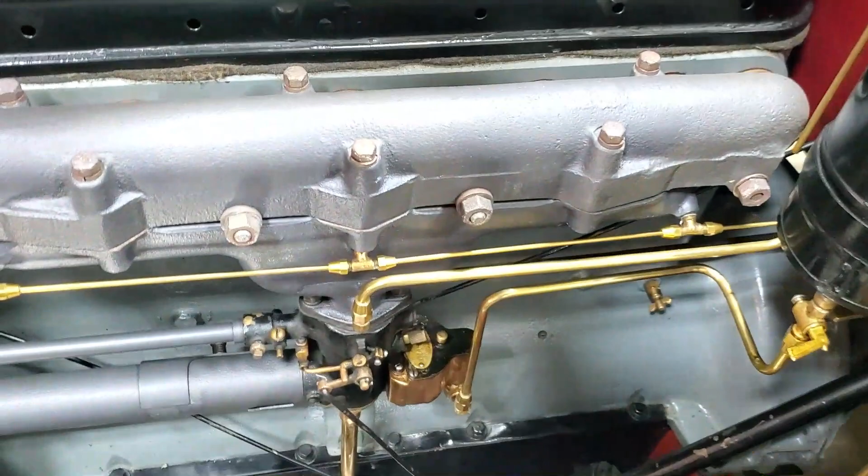This car looks mighty fine. Outside the hood and inside the hood, I call this the trophy wife of engines - beautiful on the outside, riddled with problems on the inside.

When I bought this car, the engine had been rebuilt, I think, in the 50s. They did the best they could with what they had. After that, this car had no antifreeze put in it - it had regular water, and during the winter they'd drain the water. What happened is through many years of that, the block had rusted through from the coolant jacket into the crankcase. I'll post a picture of that in the video.

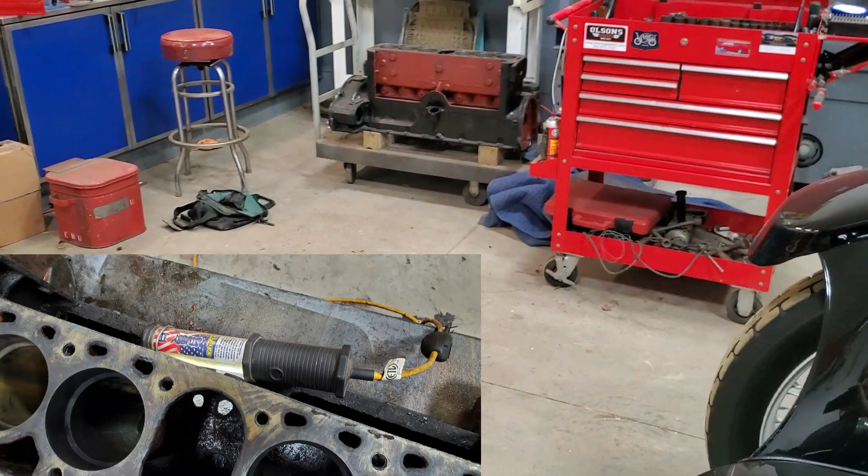Lucky enough, when I bought this car, a spare engine had shown up. It was not in the shape that it is right now - it was a rusted pile of metal with mice living in the coolant jackets. I cleaned it up, sent it to a machine shop. I'm not going to mention the machine shop's name. I think they got in a little over their head with this engine, and I'm going to explain why.

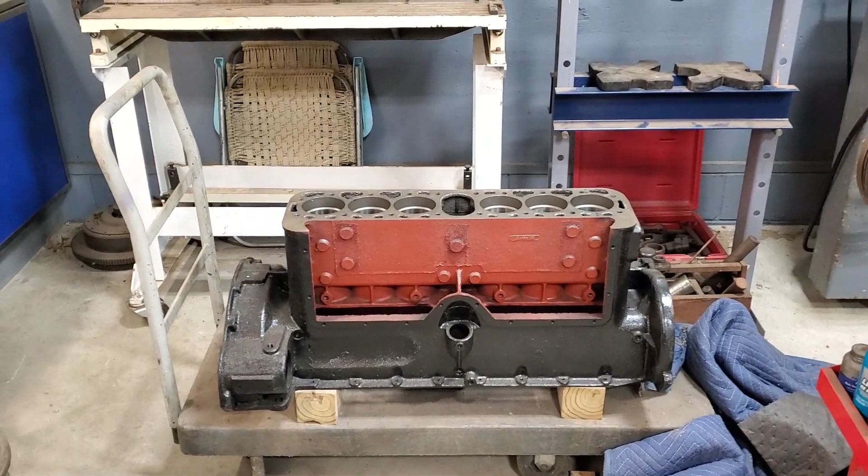I got this engine back a year and a half ago. I should have rebuilt it then, but I was pretty discouraged with what I found. I have over 30 years experience building engines, and I just don't take anybody's word for anything. So I got out the micrometer and the bore gauges and went to town.

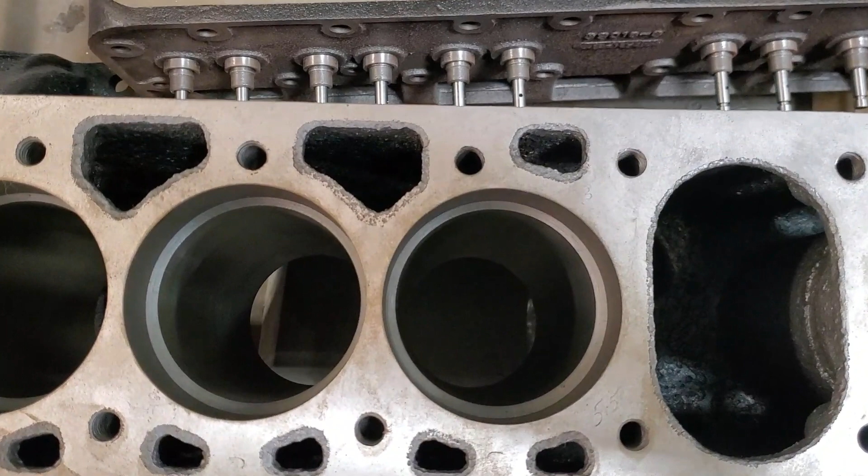The first thing I noticed by looking at the engine is if you look straight down the bore here, when they bored it, they didn't do it centered with the old crank line. You can see there's 5.5 millimeters here, and there's 3 millimeters here.

Now, at the time I sent them the block, I asked them to sleeve it. They told me, after they had the block for almost a year, that they couldn't sleeve it for various reasons. I should have gone and got the block - I didn't. They bored it over, off center. Every single bore. I only have 3 millimeter wall thickness on this side into the coolant jacket, and it's on the thrust side.

I'm keeping my fingers crossed with this because this is not a high horsepower, high torque engine - we might be all right. If you can see down in there, there's a casting web from the outside of the block to the bore, and that's where the thrust is going to be on the piston. So that might help.

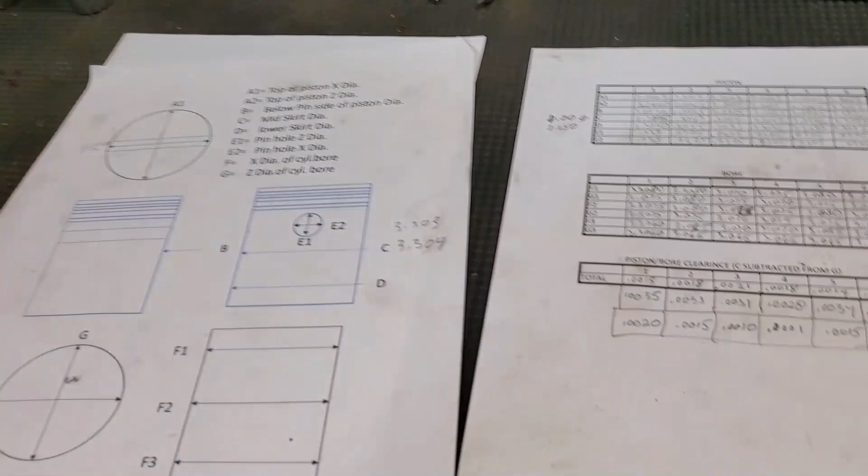The other thing I'm not happy with is when I measured out the bore piston clearance on the thrust side, they only gave me 1.5 thou. On the pin side, 3.5 thou. It should have been 3.5 thou all the way around.

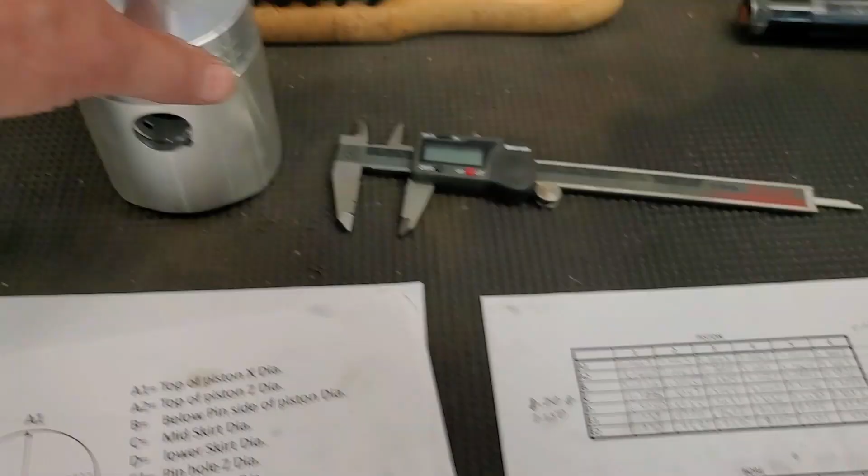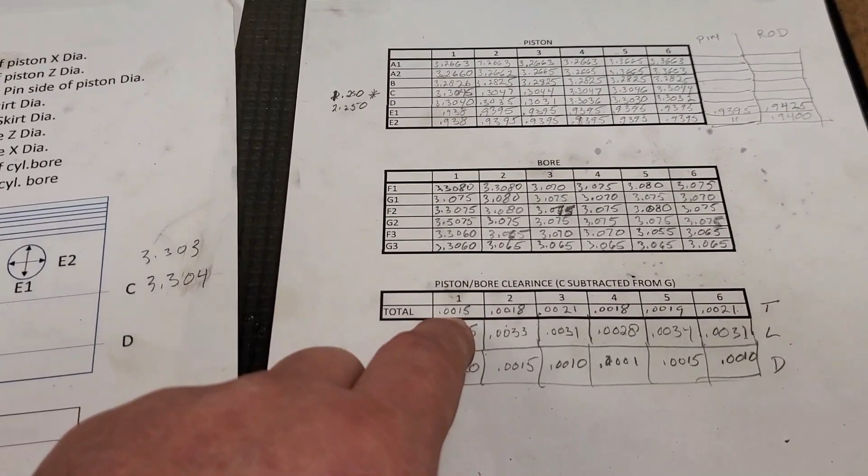This bore is not round. We've got aluminum pistons going in this - they heat up quicker than the block would, and that will tear up a block bore pretty quick. I need at least 3.5 thou, I don't want much more out of that. So I was pretty discouraged with that.

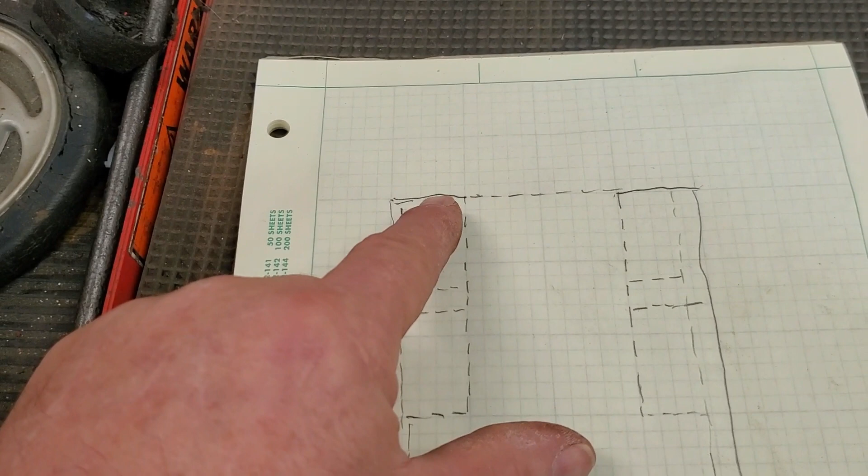This is looking at the block front-wise through. Those are those casting webs that I was talking about. I think what they did is when they bored this block oversized, they were taking too big of a cut, and as the cutter started to come down, the bore actually deflected - it did one of these deals here. It also did the same thing between bores.

These are not Siamese bores - there's coolant jacket between the bores. So it deformed the bore when they were taking their cut. That's the only thing I can think happened here.

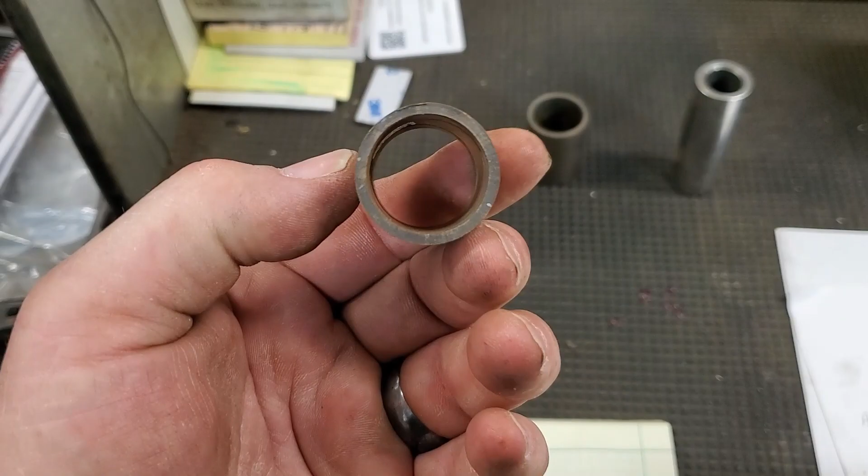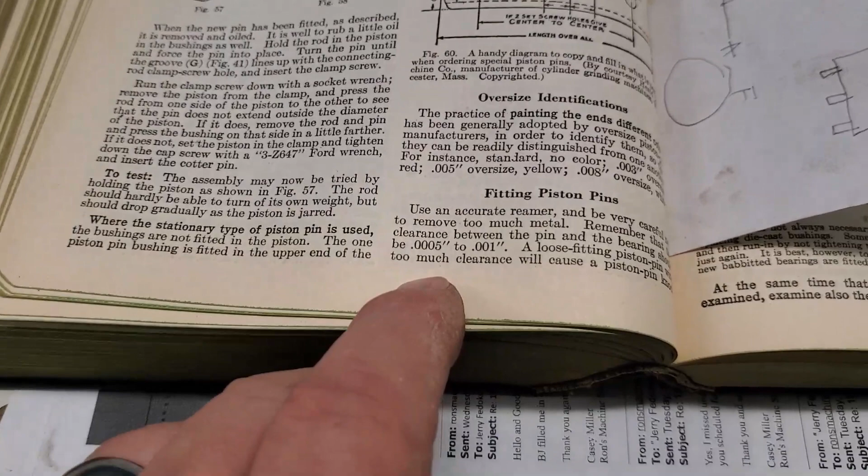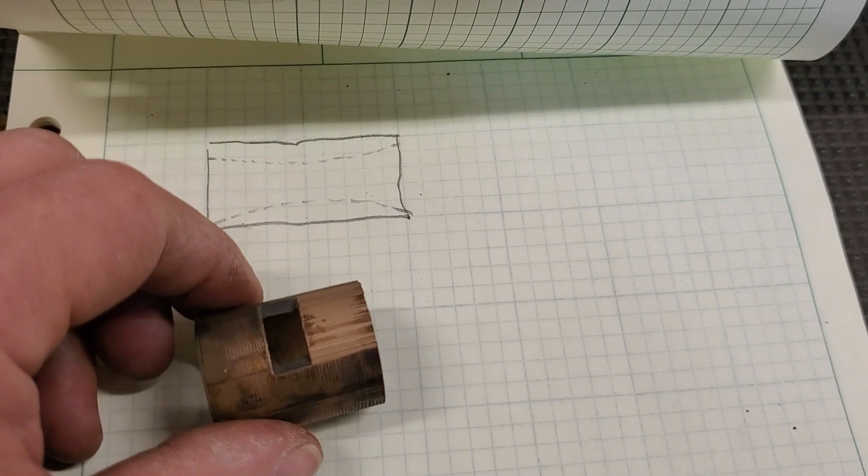Another thing they did - this is the stock piston pin bushing. Now I've got my Dykes manual out here, this book is from 1922 I think. I should only have a half a thou to a thou pin bushing clearance. What they did, I don't know why, is they machined or polished the bushing, and on the inside it's tapered. I've got 4 thou clearance on either side. So the piston is going to be doing this, and that's not working for me.

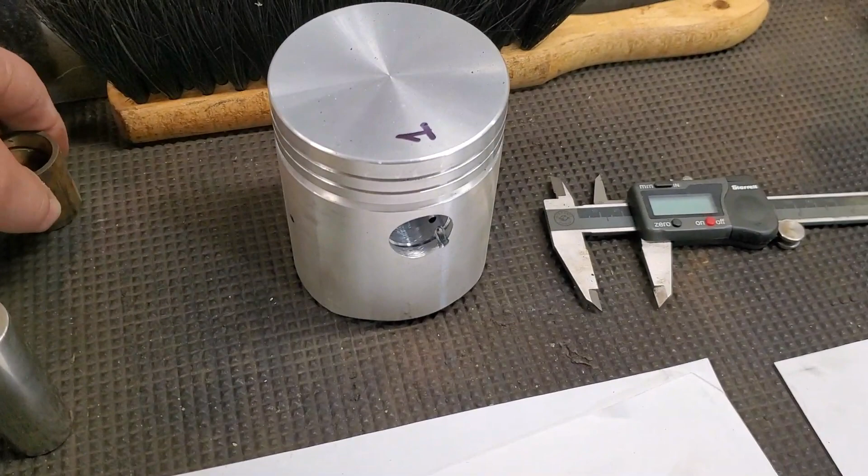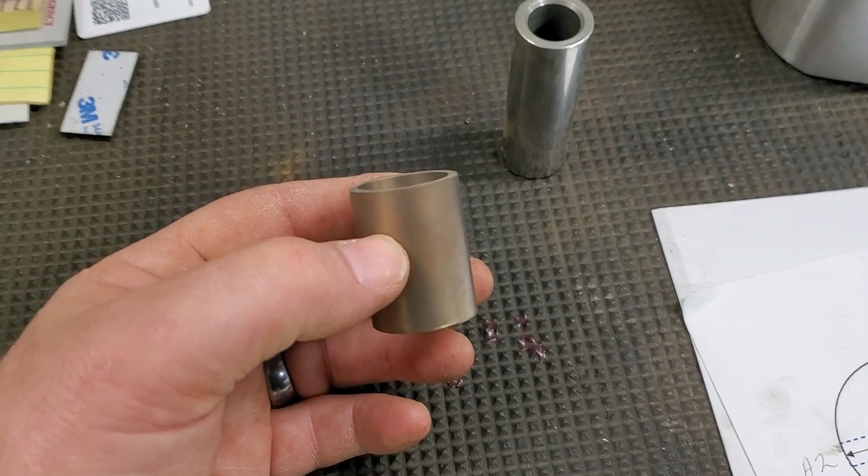So I called the manufacturer of the piston and gave them the spec of what I wanted. This was during COVID, everything was a little crazy back then. They gave me the right OD, but they gave me the same ID that the pin is. So now I've got to fix that.

So those are, I wouldn't say major things I need to fix. I just need to get in it and do it. And I'm going to start now.

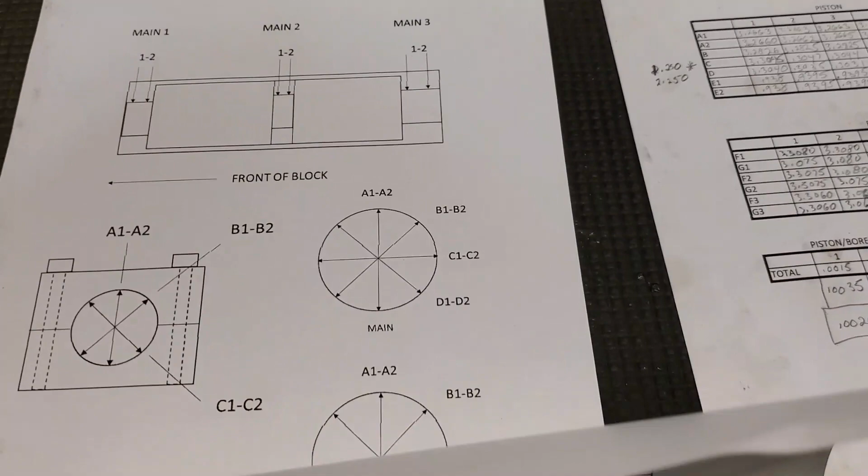When I called the machine shop and explained my dilemma, I sent them my build sheets that I had made out, and he told me I was overthinking this. I should name the machine shop - I'm not going to. They seem like really nice people, and I think they just get in over their head, that's really what I think happened.

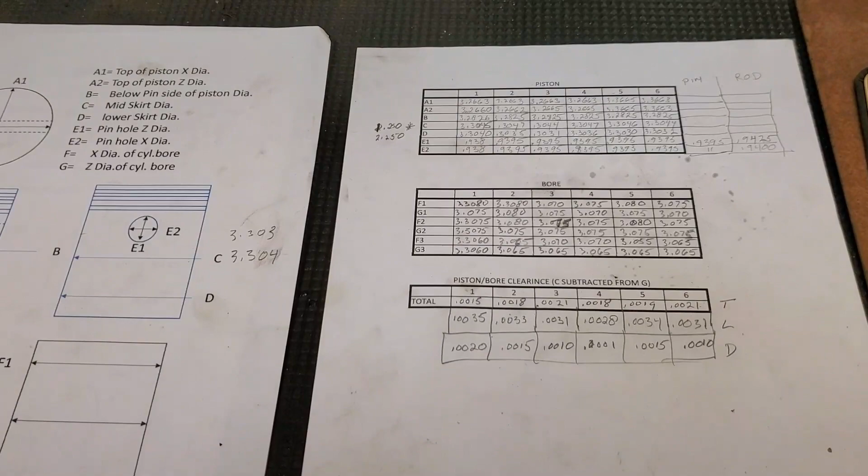I'm not overthinking this. I'm going to try to fix the screw-ups and get this engine together. The way I'm going to approach it is I've got a head over here too that they put guides in, but they were afraid to put the seats in.

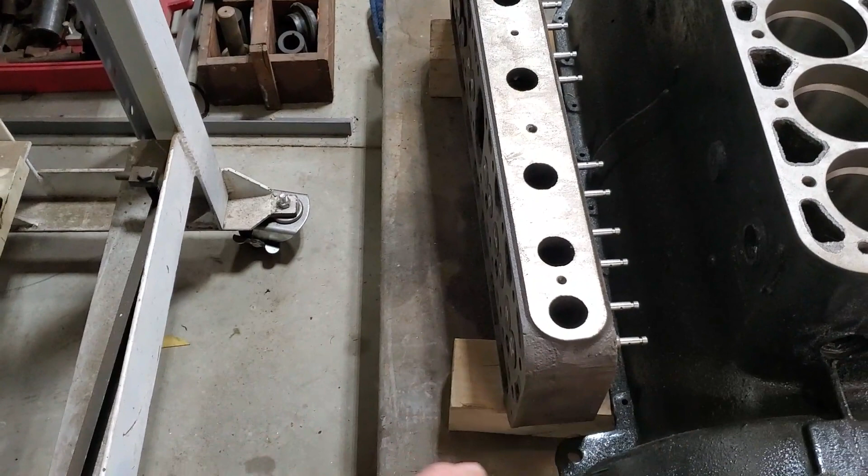I have contacts at Roush Industries. They were more than happy - they put hardened seats in it, and they tweaked the guides to where they needed to be.

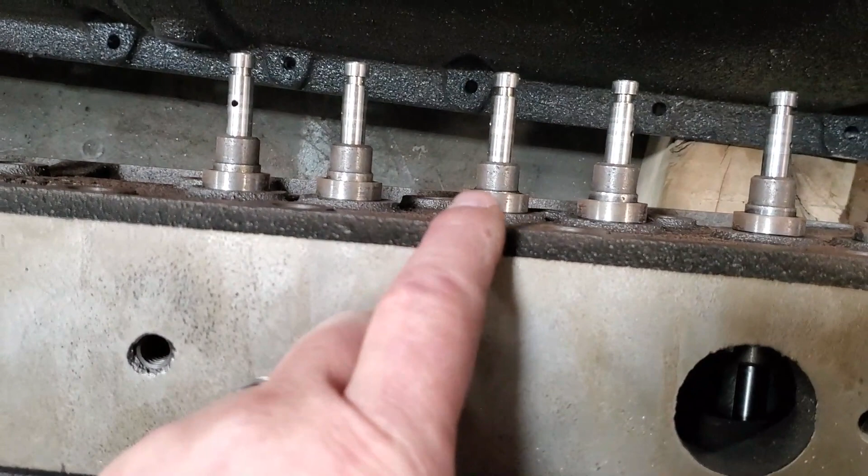I don't know if you can see, another thing - when the machine shop, not Roush, the other machine shop put in the guides, you can clearly tell they put them in at different levels. My standard for quality is way above what I see here. Don't ask what the machine shop is, I'm not going to tell you. I'm just not going to use it anymore.

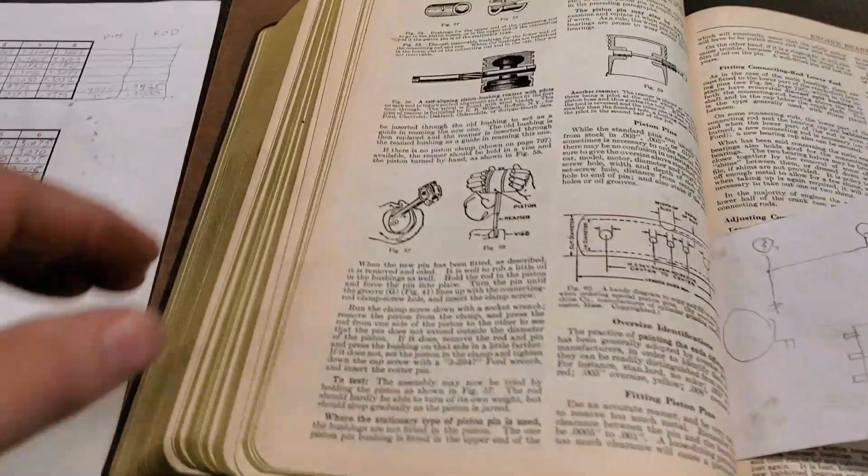Okay, now let me figure out how to approach this stuff. The book says use reamers to do this, but I have a lathe - I might just set up a boring bar and put these in there.

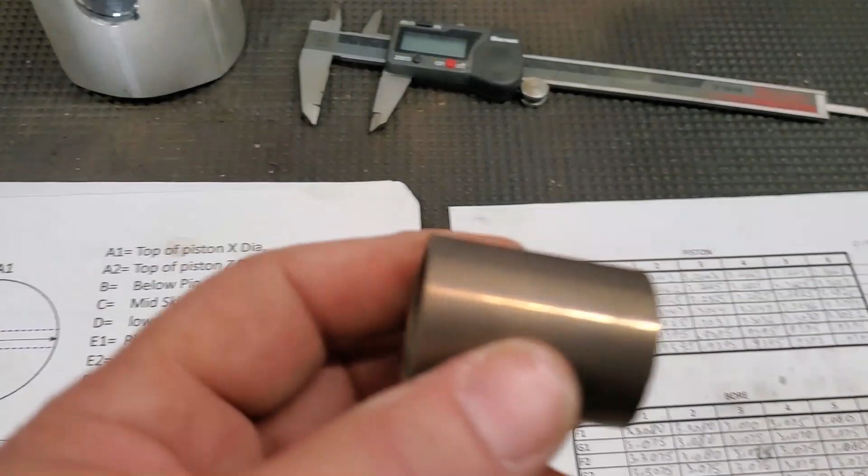Now I bought myself a hone stone, a good one, not one of those little cheap ball ones or blade ones - I got a real hone. I am going to try to lightly dust these because I only need to take 1.5 thou off. I'm not going to do it wet, I'm going to do it dry, and hopefully it takes care of the problem.

Okay, as I get going, there'll be more videos to come.